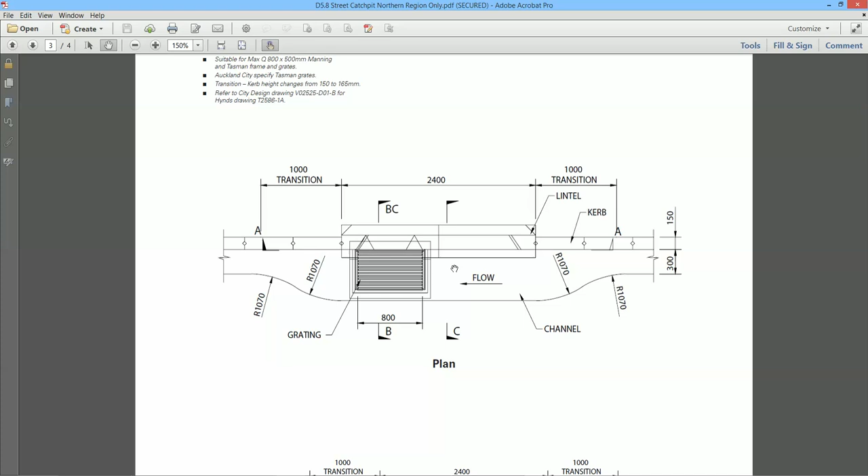I looked in, I think in the Hamilton one, where the double sumps were like 400 apart, so I've allowed for that. Essentially I'm going to have a bit of a meter sort of transition in here, which is what I've gone for.

So it's a bit of a mash up of all of the things there, but it gets across the idea that we do need catch pits. We need to consider water with our road design, and we have a thing to follow.

So the main things I've got out of here is it's around about 800, and I think I've gone with 450 and the 1070 radii that they've got here. Why they've chosen 1070 escapes me a little bit - it may be some sort of metric crossover from 10 foot or something like that. I'm not sure, but nonetheless 1070 it is.

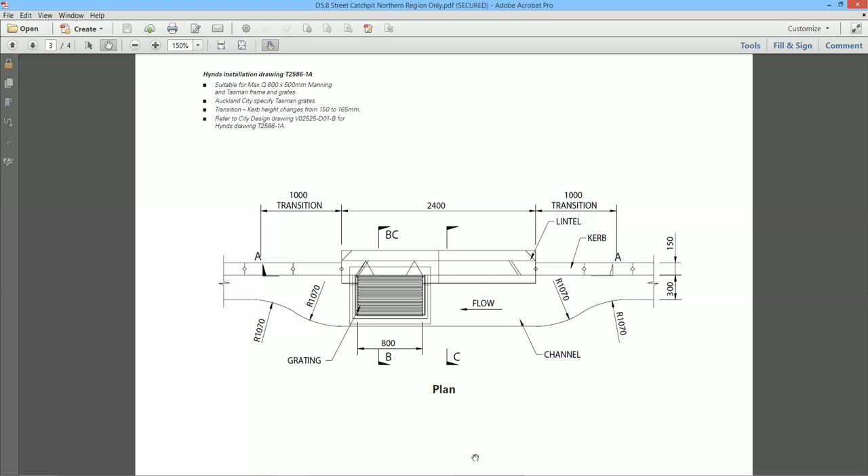So let's just go back to our drawing here, and you can see that I've put the double sump there, and I've got the water flowing out of the cul-de-sac head. So I've decided that we'll put a single sump in there, and that'll catch that water.

I've positioned it sort of there, but 100, 110 down to 40, so 70 meters there and possibly there. So it's pretty even. Remember, catch water coming this way is coming around both of these as well.

So one of the reasons for positioning and having the water tipping out of the cul-de-sac head is we don't have to bring the infrastructure for the sumps quite so far.

But clearly, if we wanted to have a reticulation or an outlet for each lot, we possibly would have to bring reticulation up to a manhole here and have laterals out to these lots.

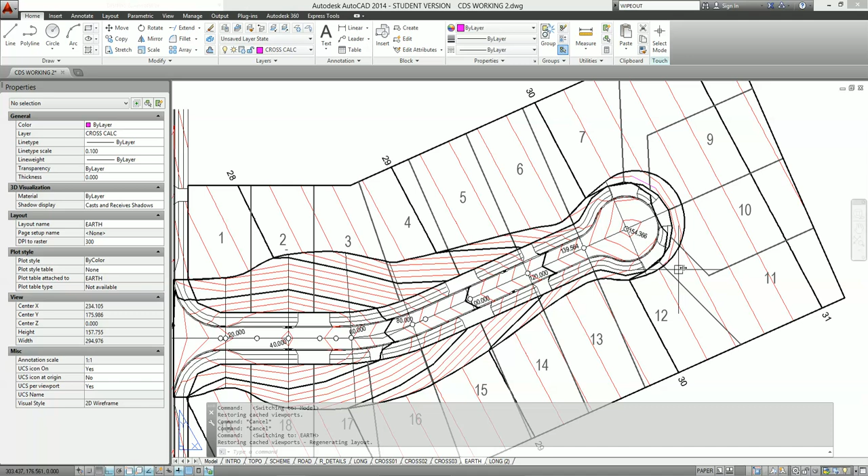But anyway, I've put a single sump in there. Now, one of the things I've done is used a lot of mirroring here because it's the same one side as the other. So once I've established the layout there, I just mirror it over to the other side and partly up the end here as well.

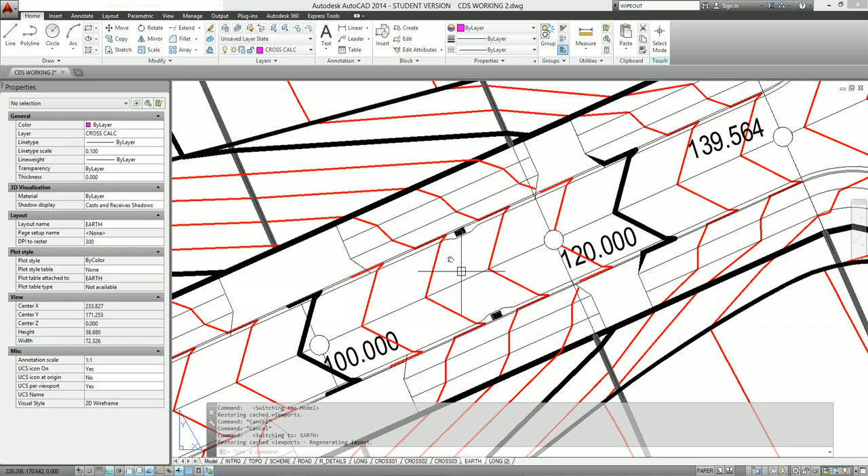So that's also partly why I chose to have them on the straights. It's probably a good idea to have them opposite each other because it means you can shorten the leads to the manhole, what have you.

Now, drawing these can be a little bit tricky, especially with the S-shaped curve and that in there. So I've just got a little demonstration here on how to draw them.

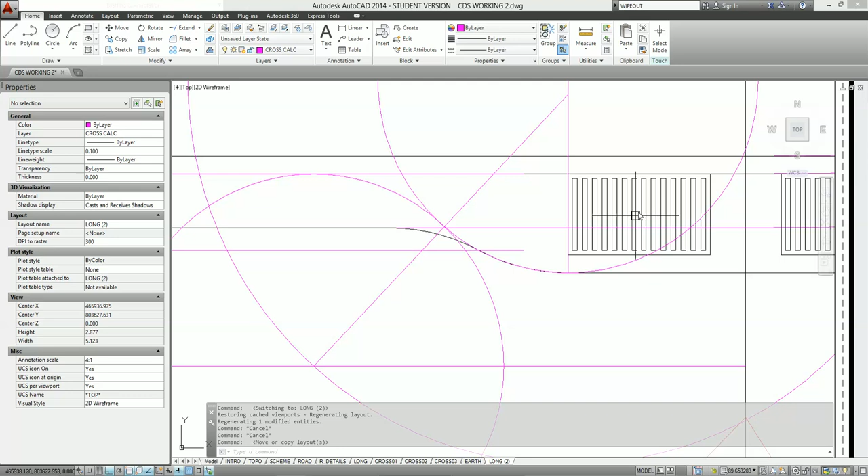Just a couple of things to note. First of all, the grates, which I've shown as 800 by 425, I think it turns out, and I've shown them there with the slats in this direction rather than that direction, so that cyclists travelling along the road close to the curb can run across the sump without getting their tyres caught in these here if they were around the other way.

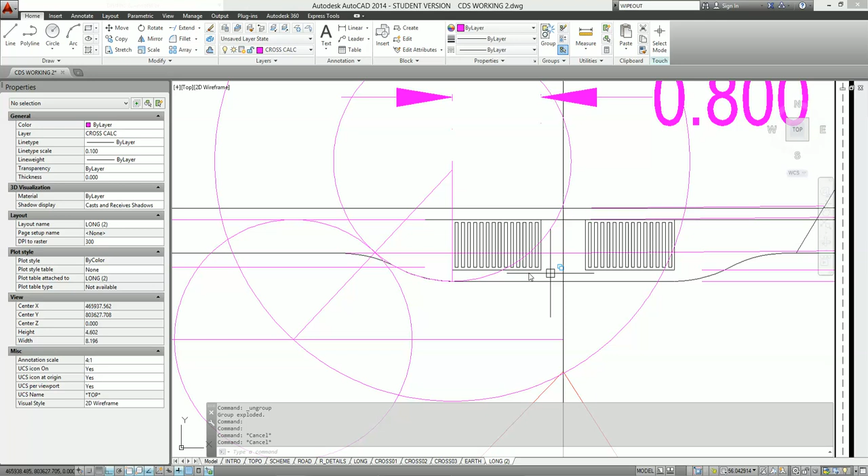So the first thing I did was just put in the two things, and I've actually got these grouped here at the moment - I'll just ungroup them. I've got these set up as a little block called grate, and then I just drew a line across here and offset that by the 100 mils that I've shown here.

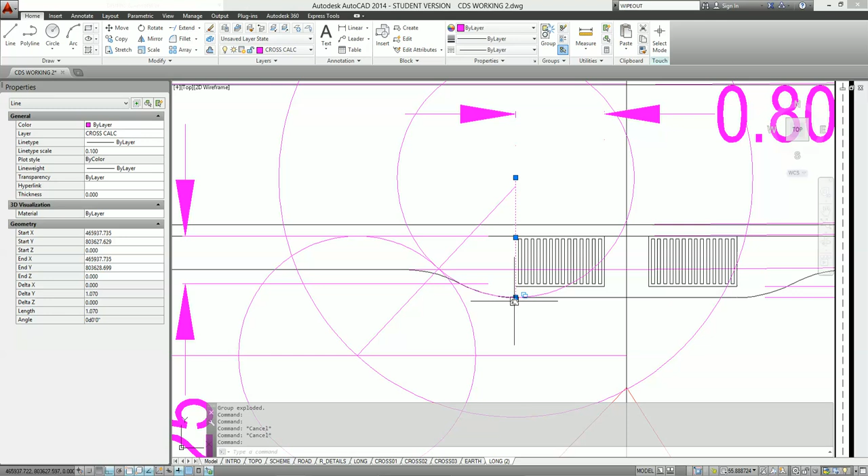So then what remains to do is get a reverse curve in through here with a radius of 1.07 metres. First I set up here and drew a line perpendicular up through there at 1.07 metres long, then drew a circle of 1.07 around that. So that's tangential there, and it'll come through there.

Now it remains to find the centre point for this one, which will be tangential at the same common tangent point, but also tangential here. So what I did was an offset from here to here, and that should be 1.07. So we know to get a right angle through there for that one, that radius has got to be 1.07.

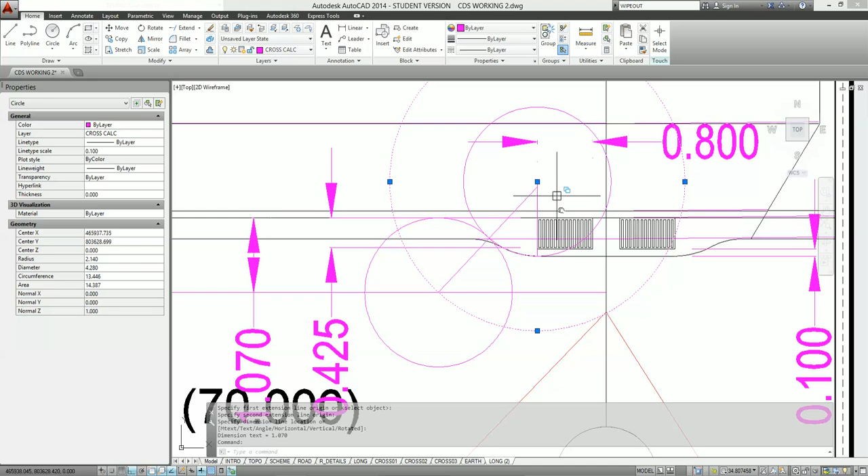Then I drew a circle of 2.14, twice the radius, because you're going to have 1.07 from here and then 1.07 from there, giving you 2.14, and that comes through that point. So I'm able to draw a line through there - that should actually be up on there like that - and that is where the common tangent point will occur.

As you can see there, I've actually drawn it parallel to the wrong one. I saw that, so we'll just back the truck up a bit, or we can still have that there.

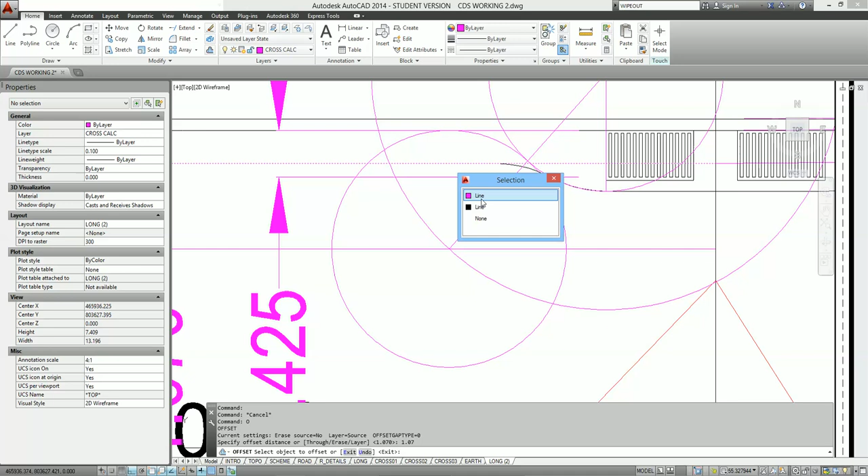It's this offset here - we should be offsetting from here, 1.07 from here, from that line to there. That's right. And then of course the 2.14 should be here, and the 1.07, and this means our line, or the common tangent point, should be coming through to there.

Like so. Sometimes it's difficult to get these to show an intersection point there. The reason for that is these heights here.

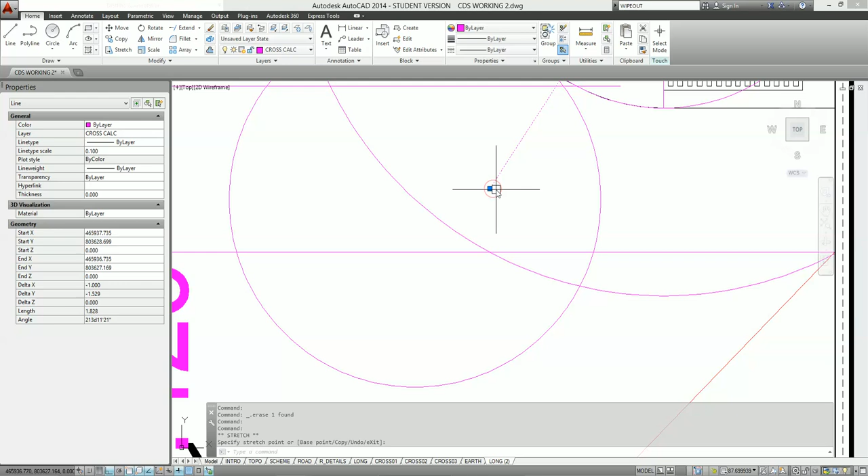So if I change that to 0 and change that there to 0, you'll see that if I now delete that out of there, like that, and try to find this intersection with this, put that out there. Now if I try to bring that into there, I should quite easily get the intersection, the cross one, which tells me I'm dead on there.

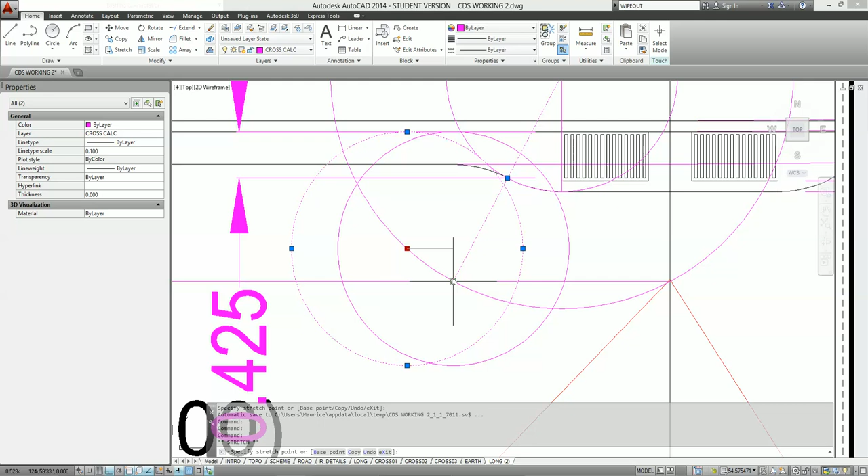So that's across there, and now I can bring my circle into position, like into this position here, like so. And that gives me my two curves which intersect with the common tangent point on that line.

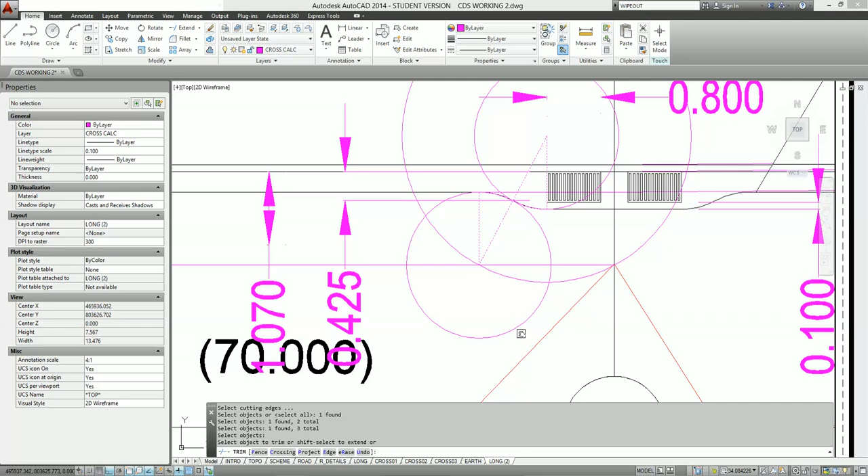I also need a line through here, like so. Bring that back into there, the right angle, and then I can trim that. Do a trim on that line, and that line, and then I can finish the trim. I can trim out that circle there, trim out that circle there, and that will give me my reverse curve.

We don't need that anymore, and then these lines here can all come out because they're no longer needed. That's no longer needed, and then obviously that's no longer needed now, and there I have my little completed curve round through there.

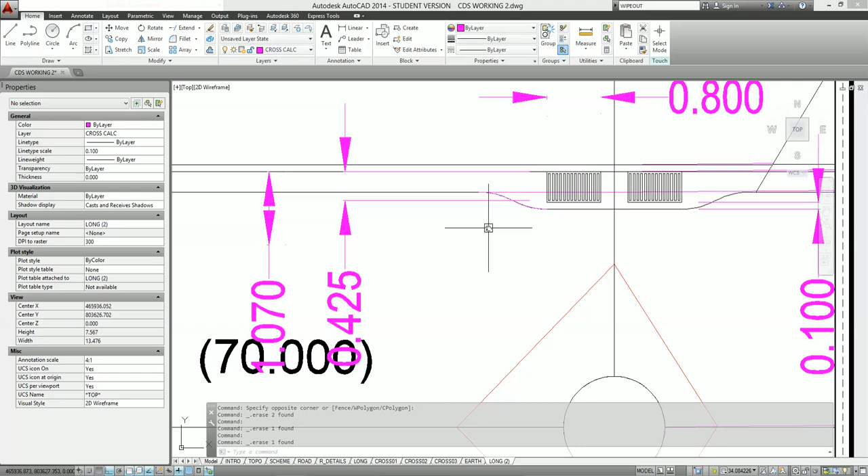Which I can mirror off this line here, which will create the one up that end there. Can perhaps just quickly demonstrate that - so just select that arc there, and select that arc there, and then MI for mirror.

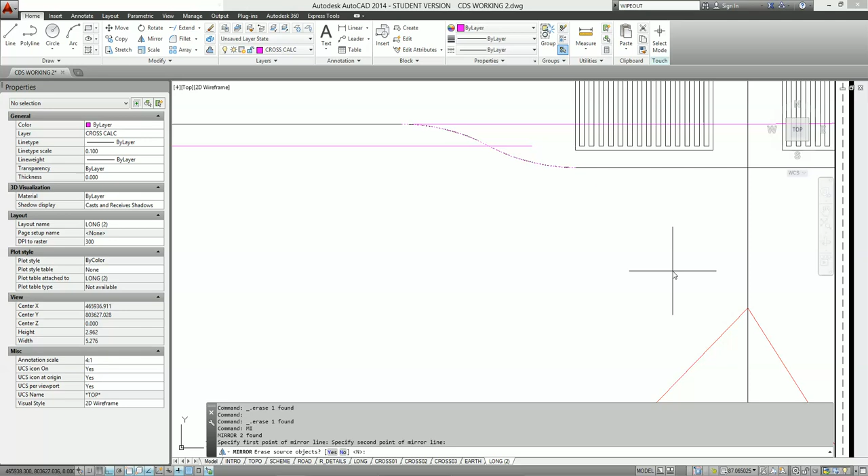Specify a point on the mirror line, which would be here and here. And do I want to erase the source object? No. And then you'll see, hopefully up the other end - yes, that there's the thing.

And then of course I used those to trim out this line through the middle here, which hopefully intersects. So that's just a few little pointers on how to draw the little curved reverse curve and get that all to fit together. Hopefully that'll be helpful for you.

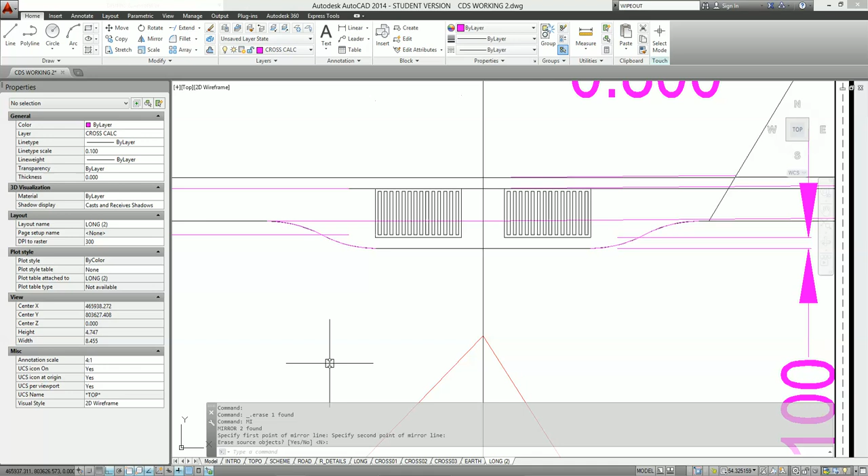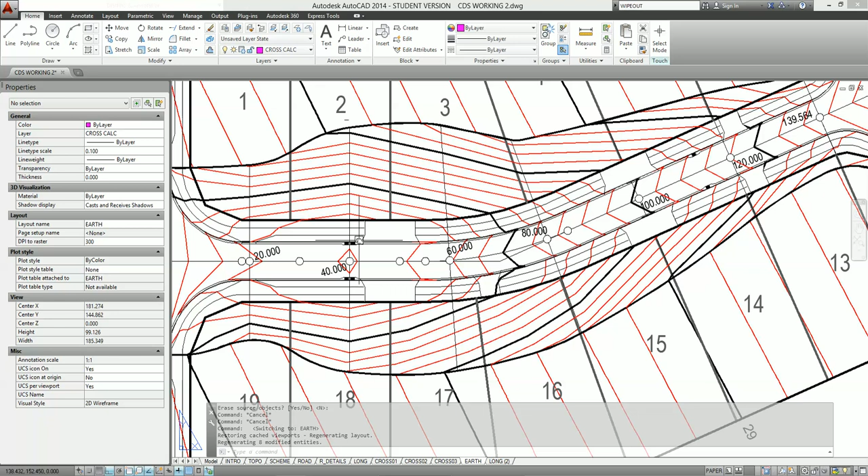So now back to our road detail, back to our earthworks cross section here, where we're showing all our catch pits and what have you. That should give you a few pointers on putting the catch pit in - remember how to draw the reverse curve properly, and how to use the mirror to get both ends of it the same, and use those symmetry features. So all the best.